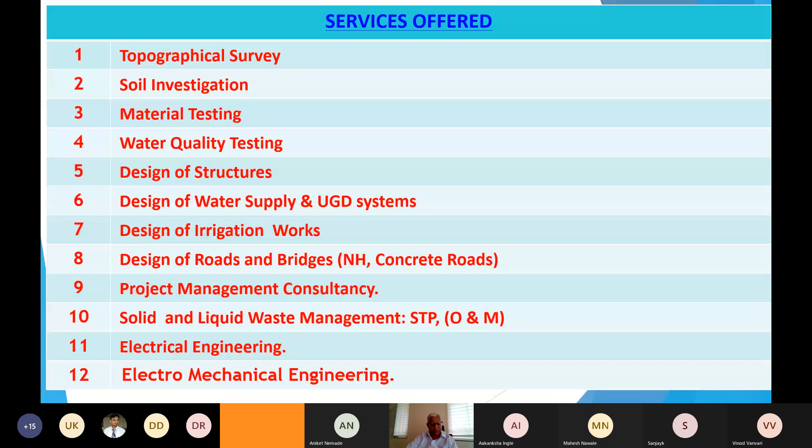We are stationed in Karnataka, with offices in Dharwad, Bangalore, and Mysore. We are practically covering almost all sectors in civil engineering. A full list is there, right from roads, buildings, water supply, UGD, irrigation, and we have been operating for almost 17 years since commencement of our organization.

Coming back to the role of testing in consultancy: testing is an integral part of execution of the work. Testing is not anything separate from the work itself. This has to be complied with a good quality assurance program, and quality assurance program can be ensured through good quality controls. Good quality controls are done with proper conducting of tests. So the flow basically consists of a work followed by a good quality assurance program, conducting quality control tests through proper appropriate tests in the field.

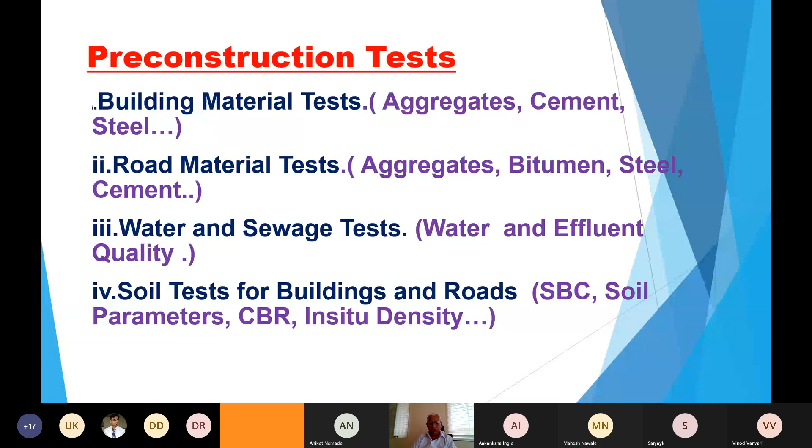Now, what are the pre-construction tests? If you are talking of building materials, you test aggregates, cement, steel. If you are talking of road materials, it's aggregates, bitumen, steel, cement, and soil also. Or if you're talking of water and sewage, you conduct water and effluent quality tests. And if you're talking of soil tests for buildings and roads, then you conduct SBC, soil parameters, CBR, and in-situ density tests as per your requirement.

Now, during construction, you have to ensure proper process control. The process control is checking whether whatever you have planned is happening on the ground or not, and you have to measure those requirements. Again, it's done through testing. Like in buildings, we control the water cement ratio with proper measurement of the slump.

Particularly in roads, you have to do a lot more tests compared to buildings. You have to check the compacted density of the subgrade, GSB, WMM, then the bitumen content that you're laying on the roads, then the bitumen mix temperature while laying. So compared to buildings, the roads on-field tests are much more. So what you're doing here is trying to control the process of execution.

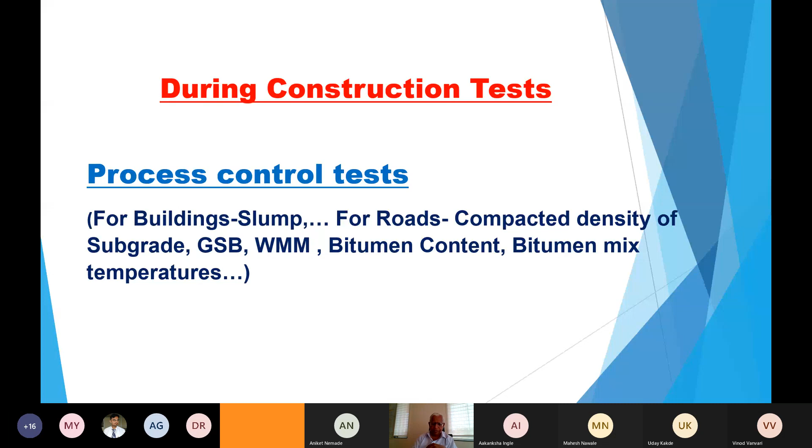Post-construction is confirming whether all you have done is as per your requirements, whether you have met those requirements or not. Like in buildings, you have cube strength, which you generally test after 28 days to see whether it is meeting your required strength. Then the bitumen layers which you lay for roads are tested to ensure you have got the required density expected. Post-construction, you also do NDT, non-destructive tests, through rebound hammer, ultrasonic test, or core extraction, and various other testing that is generally done on site, particularly post-construction.

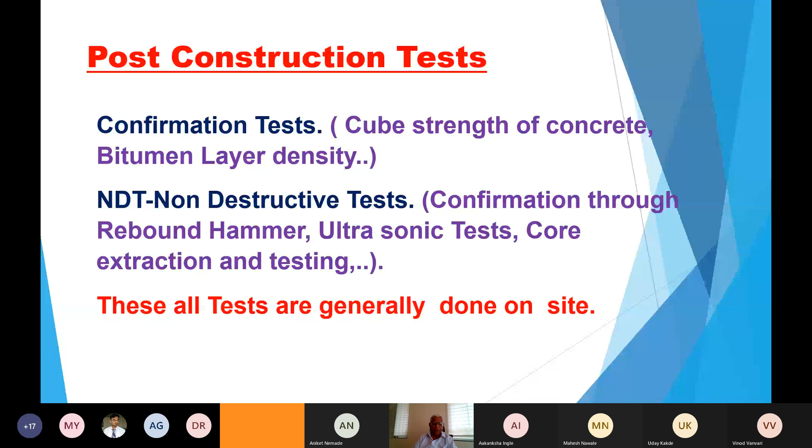Now we're discussing the testing component. Coming back to consultancy, since we're talking about the role of testing in consultancy, let's take a look at the components of consultancy, so that we'll be able to relate both consultancy and testing together.

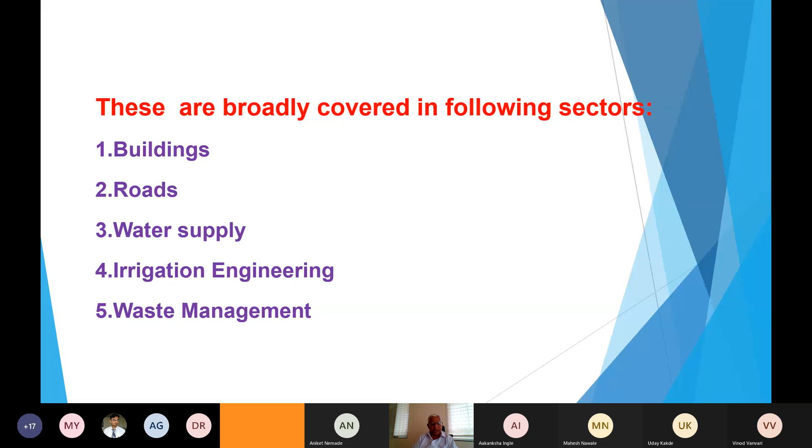In consultancy, we provide various services like survey, geotechnical investigation, topographical survey, designs and estimation, detailed project report, and site supervision of works. There are various types of consultancy an individual might provide, depending upon his or the client's requirement. These same types of services can be provided for buildings, roads, water supply, irrigation engineering, waste management, and many other fields.

Now, what are the types of consultancy you generally provide? You provide project management consultancy, third-party inspections, detailed project reports, pre-bid assessment, structural safety evaluation, and many more. I've just made a sample of a few.

Now let's see how testing is integrated with all these types of assignments. Coming back to project management consultancy, generally it might include both DPR and supervision. Sometimes it is only supervision, but in any case supervision will be almost necessary. So even when you do supervision for a project,

whatever tests the contractor does have to be overseen by the PMC. In addition, the PMC is expected to do independent tests. Generally about 10% of the tests are done independently by the consultants to confirm that the results the contractor is giving out are accurate.

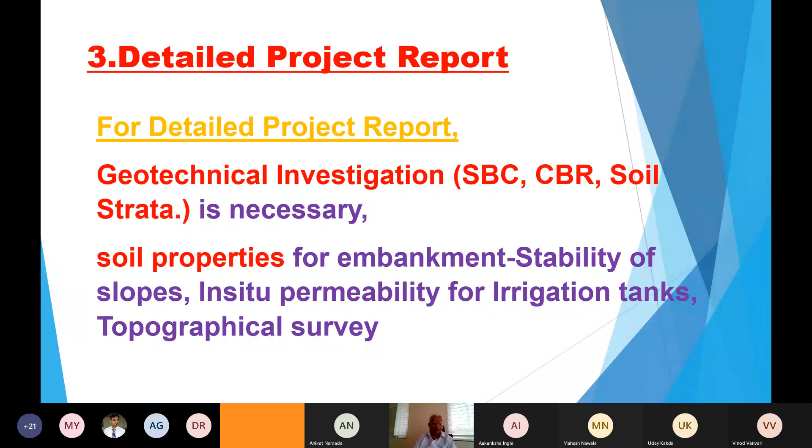Then another typical fourth component is the pre-bid assessment. Pre-bid assessment is a slightly tricky aspect where, based on your experience, you have to do a lot of things, because you will neither have the time to conduct all those tests, nor will you have the resources. Whoever is the contractor likely to employ you may not be ready to spend so much time for detailed investigation.

So you have to conduct limited testing, and based on your experience of that domain or area, give your opinion and assessment to the contractor so that he can put a tender with a proper assessment of cost. So here, if you don't have knowledge of testing, it will be a big negative for the contractor who is likely to take your advice.

Then structural safety. Structural safety is now almost a regular feature in most industrial buildings. There you have to do NDT testing, which covers many other things like rebound hammer, ultrasonic test, core test, and all. But it also requires testing plus a good sense of re-analyzing what the balance life of the building is.

Now, if testing is absent, as long as there are no failures, it's very fine. But once failures occur, then we have very, very big consequences.

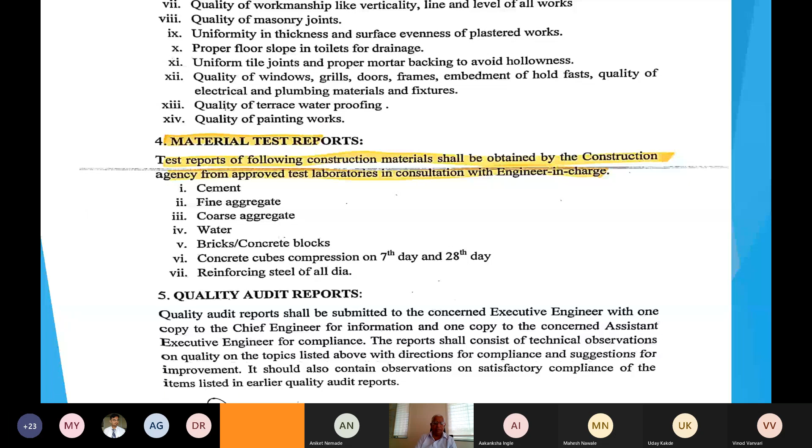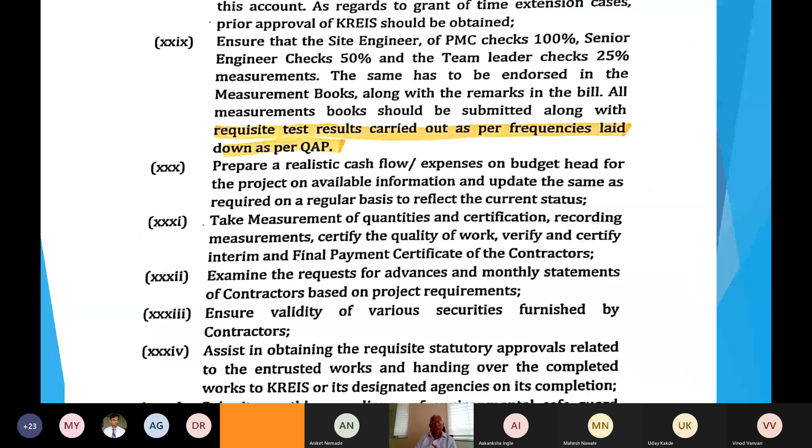This is one more project where we are doing comprehensive management, where we do the designs and also the supervision. We are totally responsible right from the survey, geotechnical investigation, then estimation, tendering, execution and supervision. So you're responsible for the designs, the cost, and the quality of execution. This is a very comprehensive activity in project management consultancy, where testing is inbuilt into all these components.

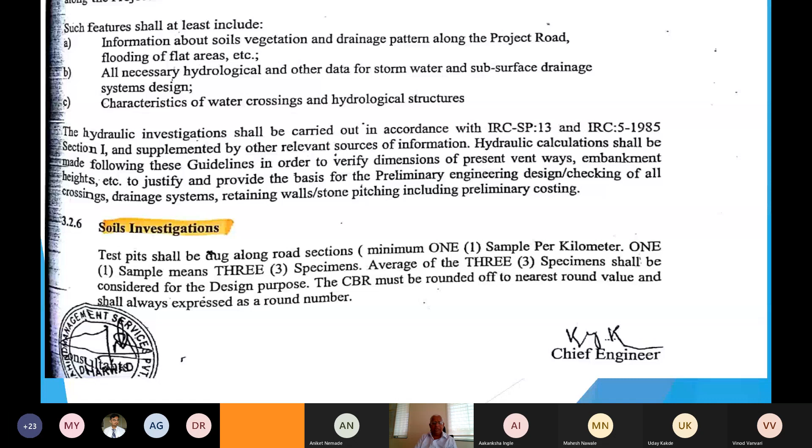A detailed project report, like this one on your screen, is the State Highway Development Project. It's elaborate testing that has to be done at a good number of locations to assess the CBR and soil properties. The number of tests we do in roads is much higher than any other building component, so soil investigations are a must. You can see in most of these screens that geotechnical or quality control work is inbuilt into it, showing how integratedly they are involved in all components.

This is a third-party inspection for a canal, where you are responsible for inspecting, conducting QC tests, everything during execution. The requirement of quality control engineers in these projects is quite high. For example, a project costing around 150 crores will have nearly 40 to 50 engineers specifically for quality control alone.

This is road implementation supervision. Here again, we have to conduct additional tests in addition to whatever the contractor is doing. The requirement of quality control engineers is high, as I highlighted.

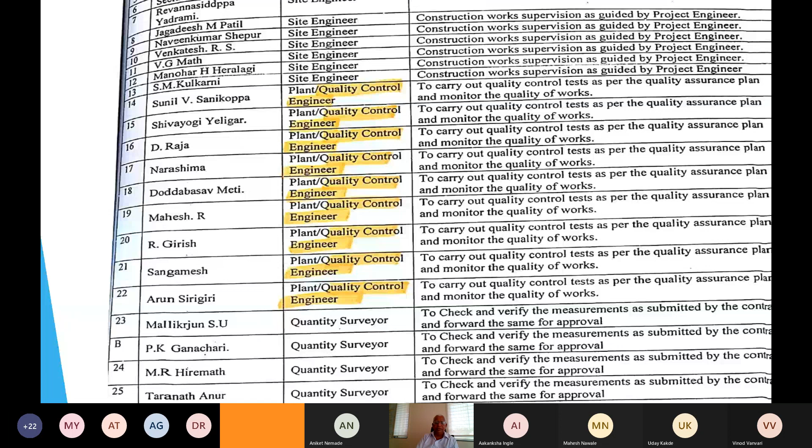Now I'll give small examples of where testing created challenges during implementation. These projects are all in Karnataka. In one case at a Karnataka Housing Board project, the contractor was not using M sand, but the sand appeared very similar to M sand. We were fairly sure M sand was not available nearby, but to our bad luck it was giving good strength after checking. Later we checked various other components and it was quite flaky. Then we realized it was not M sand, it was crusher powder, and due to that the crushing strength of the aggregate could not be achieved. Only because we had the experience and expertise to identify both were we able to catch it and get it changed.

A similar case happened with a road - the Aurad-Bidar road, near Bidar on the border of Maharashtra. The road had problems right from the beginning. Initially we looked at whatever soil properties were available and found the soil was very good, so we had almost started the work.

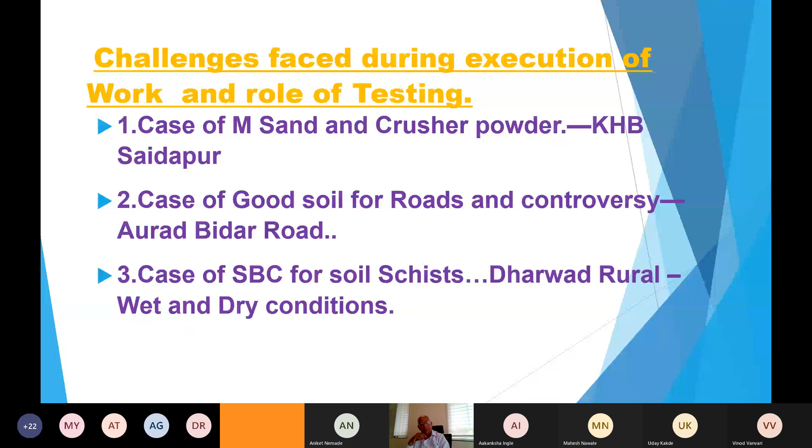Whenever we gave an SBC of about 8 to 10 for this, we used to have an argument: 'Sir, it's so hard, you are giving SBC of hardly 8 to 10.' So then we tried to educate the people. We ourselves made an analysis. Whenever there was a possibility of water contact, we tried to maintain a lower SBC. And if it was on the higher side, where they were not likely to come in contact with water, or where conditions were dry, then we went in for a higher SBC. That was because of our experiences and prior problems, we could modify that.

Now CBR for roads also - actually the CBR pattern for low rainfall area and high rainfall area is different. Like here, some of Bijapur and other areas and many parts of Maharashtra, where the rainfall is less than 500 to 600, you can go for a higher CBR. Only if it is a high rainfall area, then you have to go for a full 4 days soak test.

Some typical case happened in one biscuit factory. We were actually dismantling an RCC column and erecting a steel girder and steel column to support the RCC, so we could not have had even a bit of settlement. But to our bad luck, as soon as we cast the footing, after 2-3 days we found that it was not setting there. We were not able to understand why it was not getting hardened.

After a lot of analysis, we learned that the biscuit factory was an ongoing factory. There used to be a small dust of sugar which was unloaded at the place where we were storing our aggregates. When we analyzed it, we learned that even a small component of sugar powder is a very good retarder. So that was the main reason why we were not able to get good strength. After assessing that component, we took care and could overcome that problem.

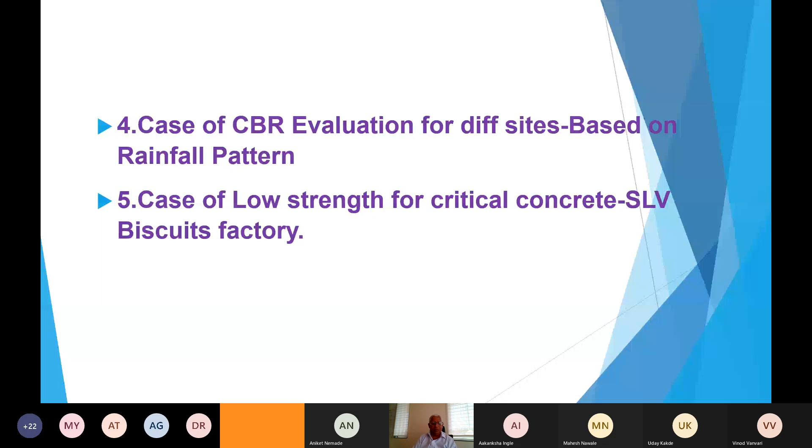Now, again, around Dharwad, there are some villages, some talukas where BC soil is highly prevalent. When you talk of BC soil, generally we just talk of low SBC. But many times we forget assessing high swelling pressure. What happens is, if the swelling pressure is high, many times the footing itself gets lifted.

This is a problem we faced in one building where we were asked to come and analyze it. We came to know that although they had taken precaution regarding low SBC, the swelling pressure was so high that it was practically lifting the footing itself. So this component of swelling pressure in BC soil also has to be kept in mind.

Under my own personal experience, I was in charge of Narayanpur Dam, the Upper Krishna project. One of the gates failed in 1992. The gate was something like 15 meters by 15 meters, and it failed. After all assessment, we could understand it failed only due to improper welding in just one joint. It is a bulkhead, only one joint - a very silly mistake there.

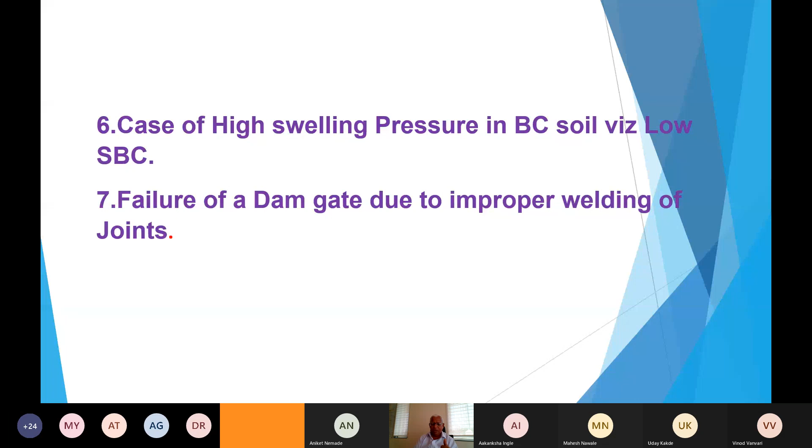So if you see any of these small instances that happen in many of the fields, if you have knowledge, if you have expertise, you'll be able to identify and overcome those problems. Otherwise, it will be very difficult to understand why the failures happened in the first place.

So testing is an integral part of consultancy, there is no doubt about it. Unless you have a very good idea about the tests, how they are done, and the procedures to be followed, you will not be able to appreciate any failures in that pattern.

That is a brief presentation which I made across. If you have any questions, you can go ahead.